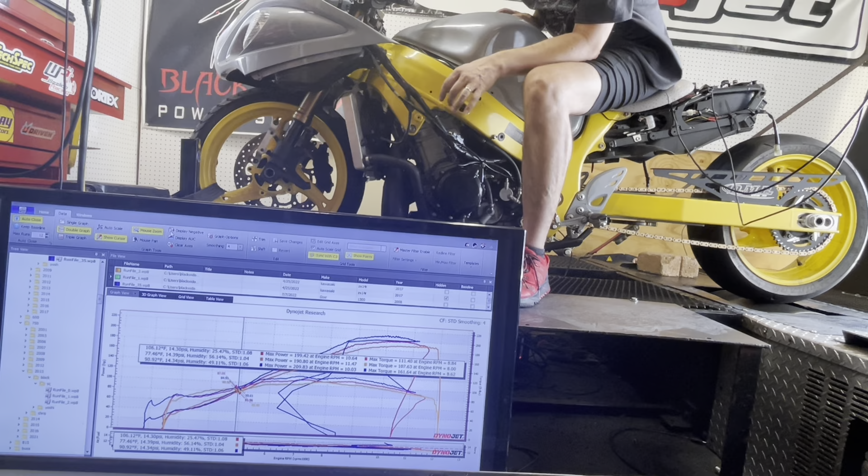It was a little too hot. Here we go again, third time's the charm.

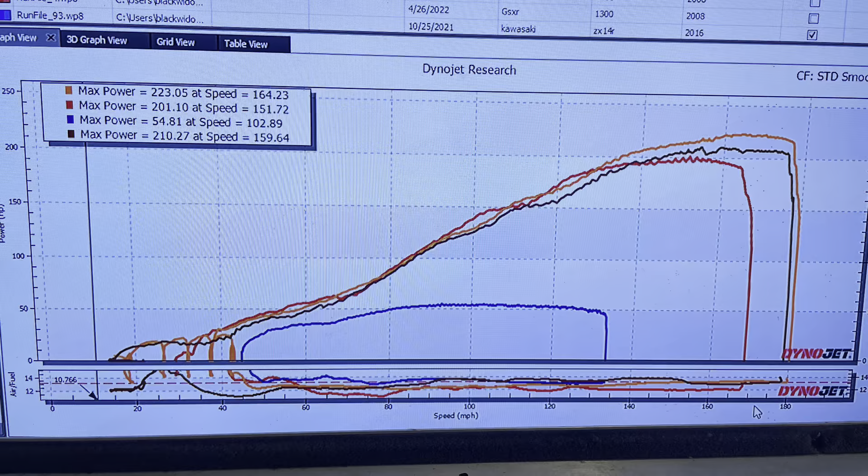So far, we got 200 from before, 210 just now, and 223 with the methanol mix.

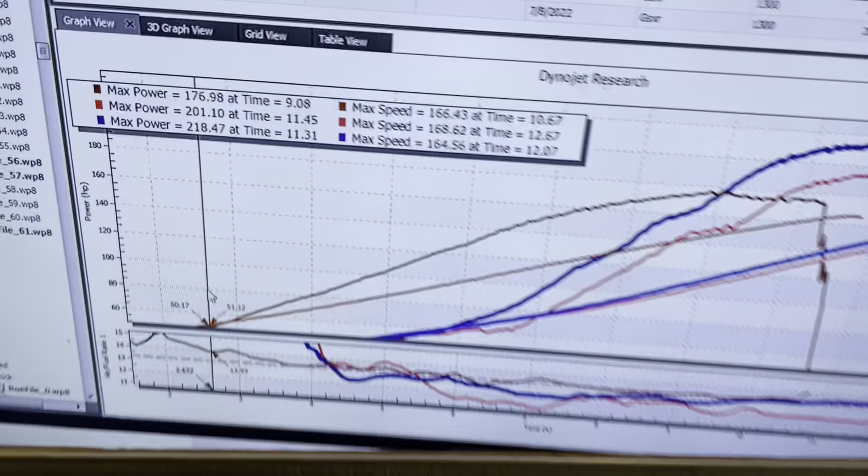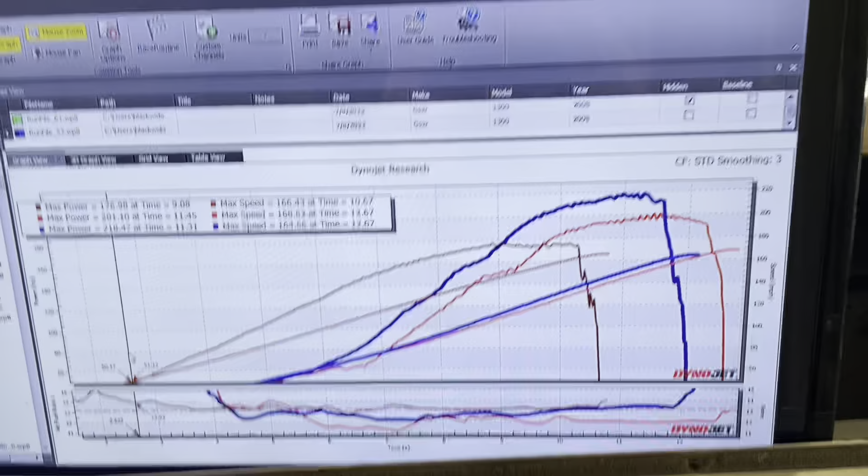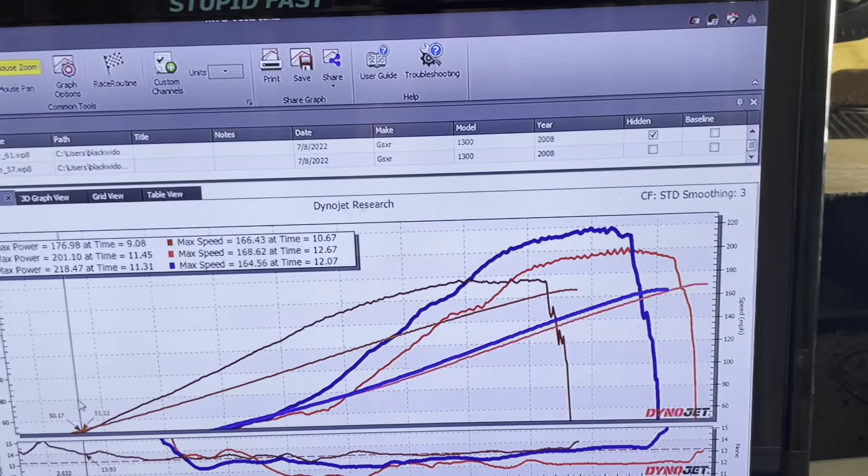All right, we got this on the dyno. It's relatively stock with a Brock exhaust, and we got the time that it started off at. These are the graphs of the yellow Busa, and I'm gonna look at them via time and compare them to a stock motor one, 1441 before we went through and ceramic coated it and timed the cams, and 1441 after.

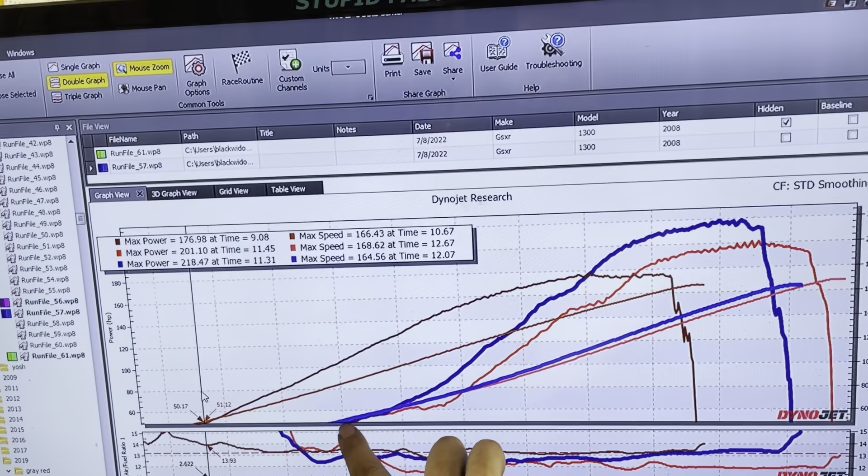This one does not have the same temperature, unfortunately. It had better temperature, so its answers are going to be slightly skewed, but you can already see both the blue and the red are starting at about the same time at 50 mile an hour, and the blue one's definitely finishing way sooner. So let's get those numbers.

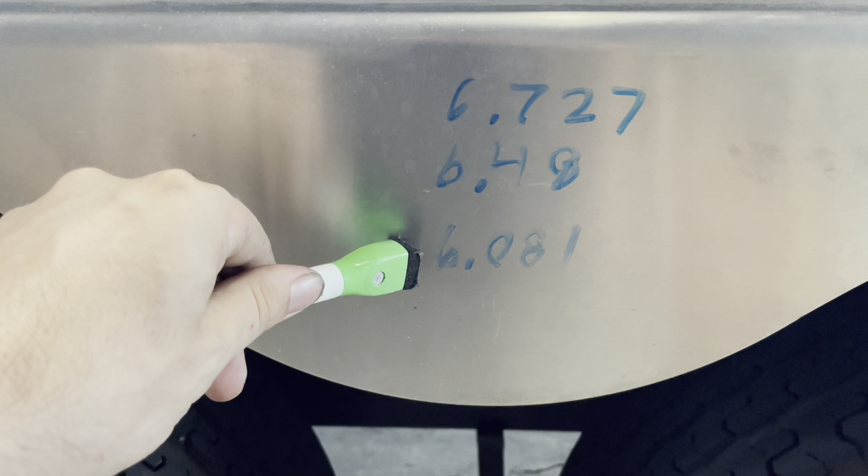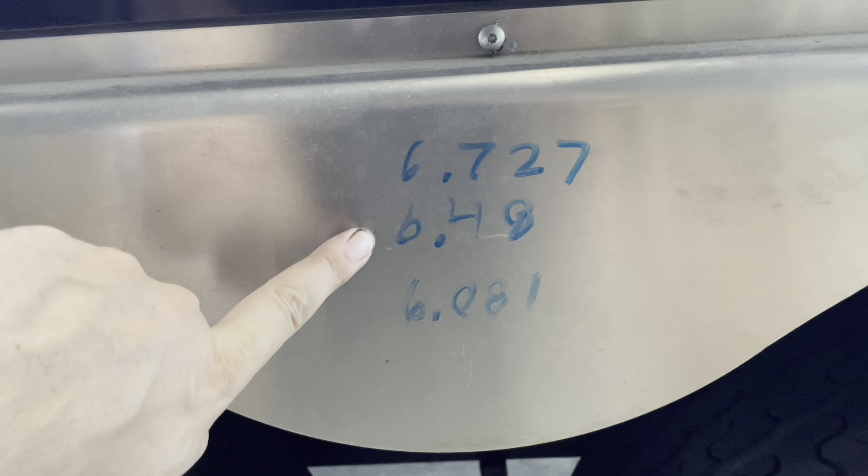6.08. So we got built motor on methanol. We got still a built motor, but not by us, on E85, and we got a stock motor. Keep in mind, this one has got a massive temperature difference. Unfortunately, I couldn't make that equal.

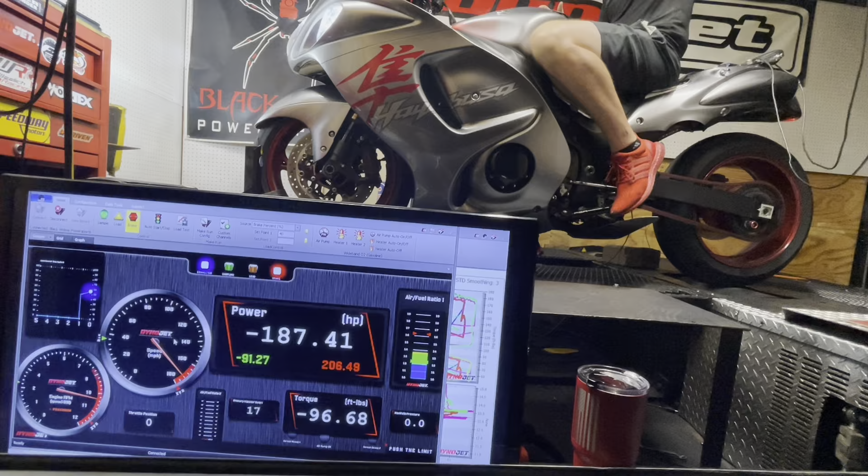Alright, so we got our graphs up on the dyno. You can ignore that 200 on that particular one. The torque is correct, but yeah, we got some spikes in the shifts there. I like showing those runs.

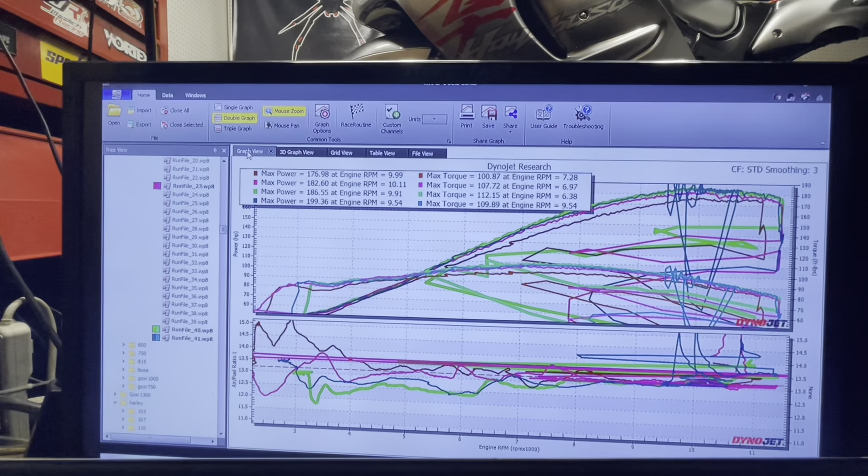But we made 177 on the first run of the day. 100 foot-pounds of torque, 101 foot-pounds of torque, round that up.

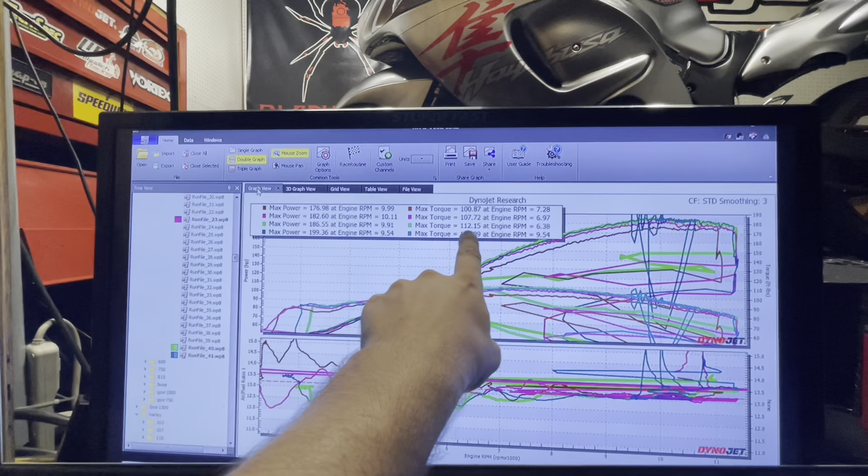Gasoline, we made 182.6 and 107 foot-pounds of torque. And E85, we made 186.5 with 112 foot-pounds of torque. And that was the run that you guys just saw. So I'm pretty stoked about that.

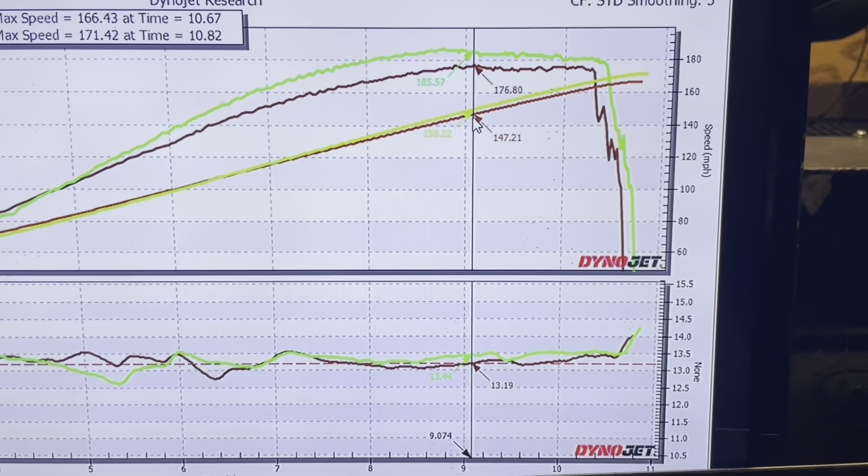See what E85 does with ram air.

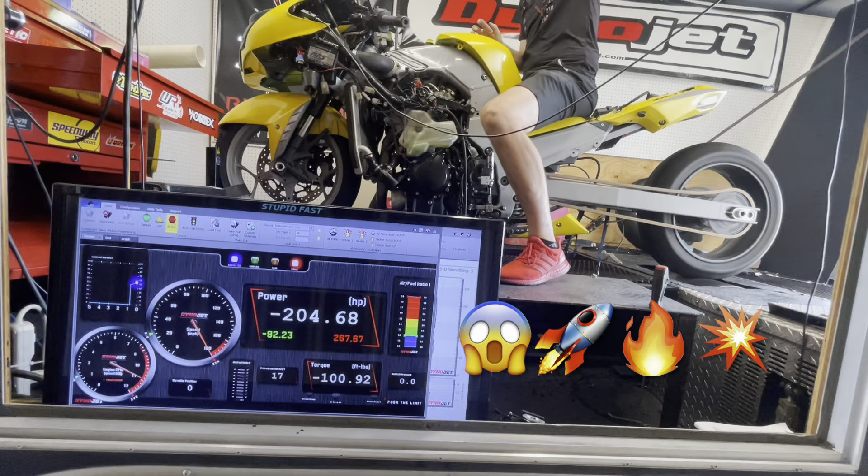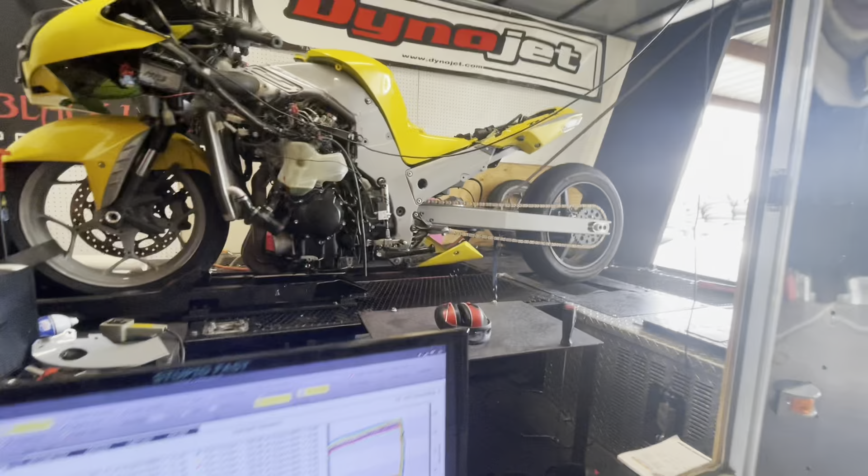We got a different wheel on the back. That's a different tire. No more stupid correction factor stuff. So the torque we made is the torque we made.

So she's actually making 133 foot-pounds of torque, and without ram air, 247, which is a new record for the dyno. On ram air, 257 is peak horsepower.

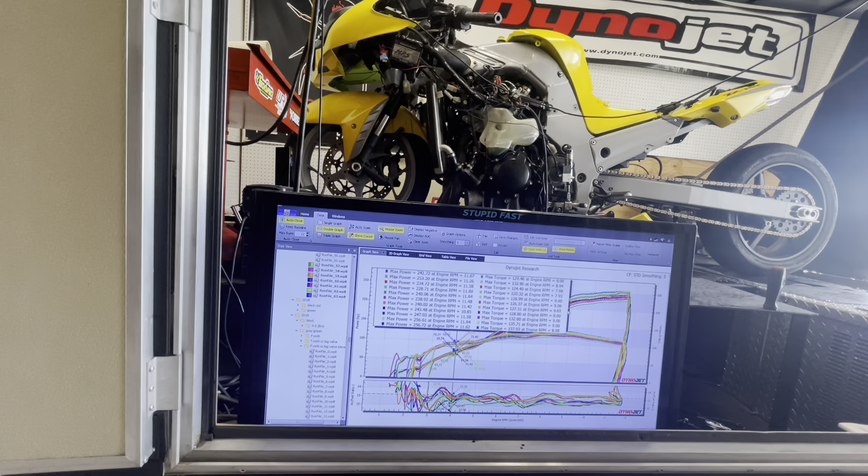She's dripping a lot more. She likes the fuel fatter. Not a new torque record, but definitely a new record.

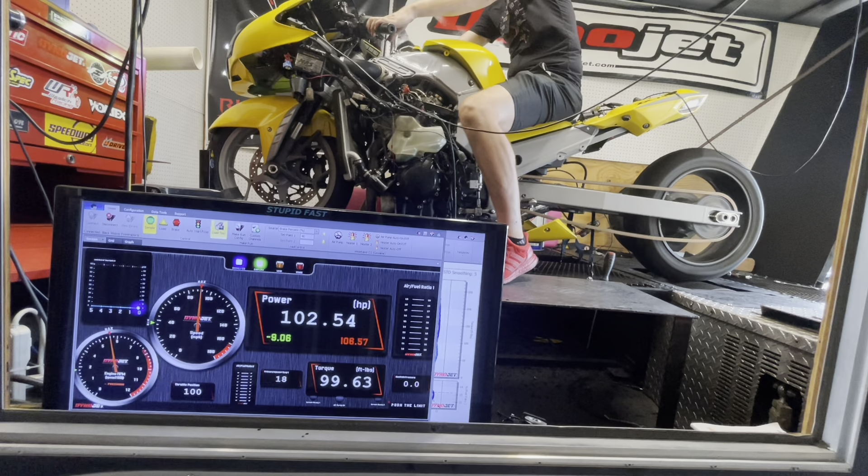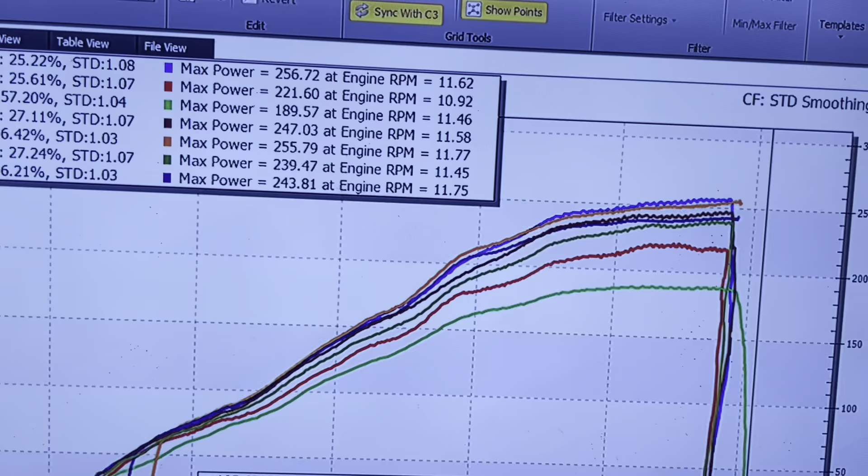I got up on here the yellow one and the black one. So the yellow one's actually the blue run is its best run of the day, and the orange run is the best run of the black one that we built before. It's making some decent amount of power more.

257 versus the 255.8. One peaks out a little bit more and the other one hits a little earlier. But they're both making about the same. Slight differences in fuel between the two. They're running similar mix, but not the same.

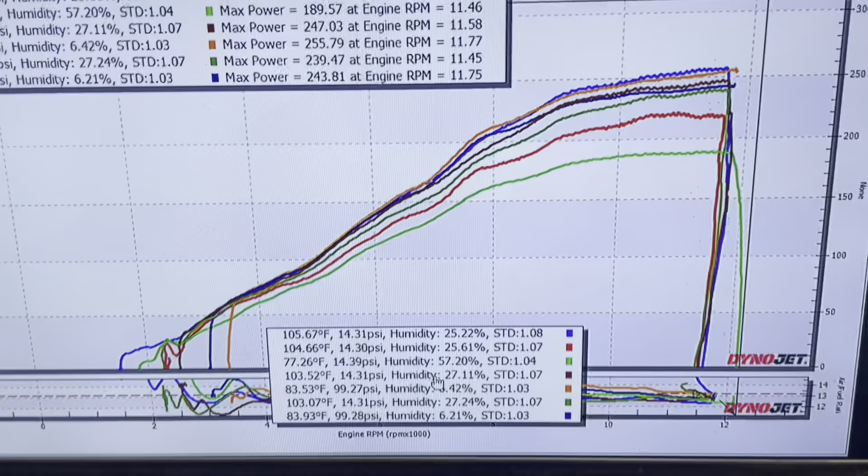And the black one has our velocity stacks. This one does not. But this one also has a high compression piston, and the other one does not. Rest of the modifications are about the same. The exhaust on this is an M4. The other one is a C2.

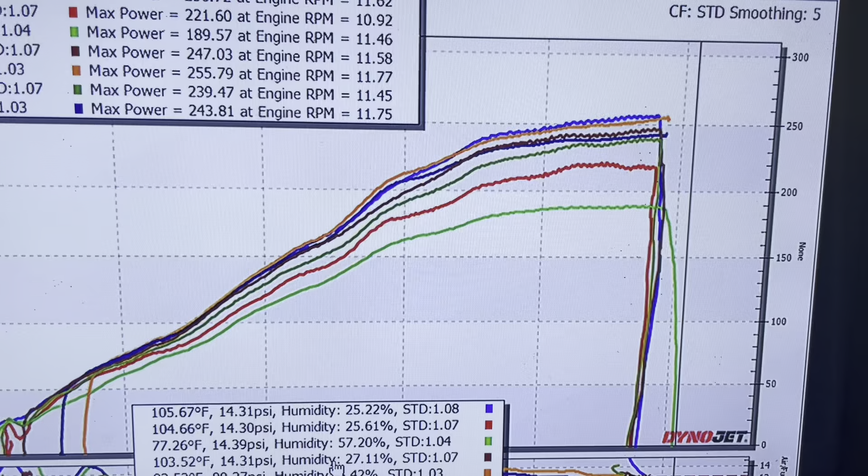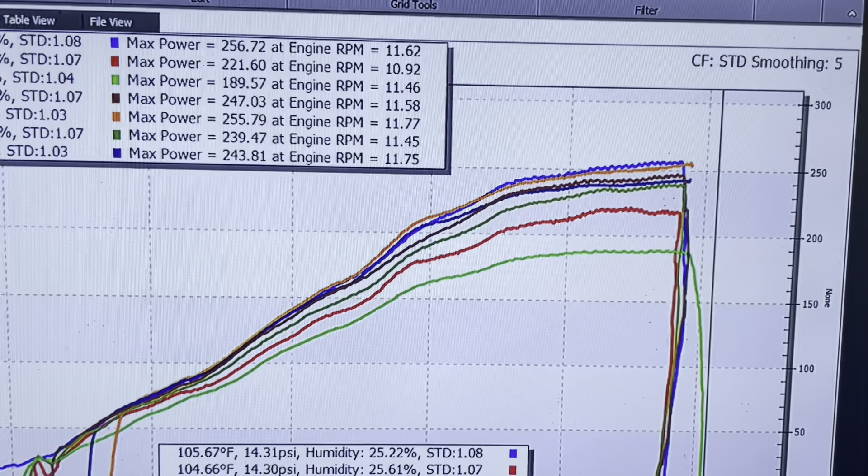That green line is the before. The red line is some gasoline that is some race gas per se. It's not MR12, it's just 100 octane stuff. And then the green line that is in there, that is E85, and then the brown is a different fuel. The dark blue is a different fuel.

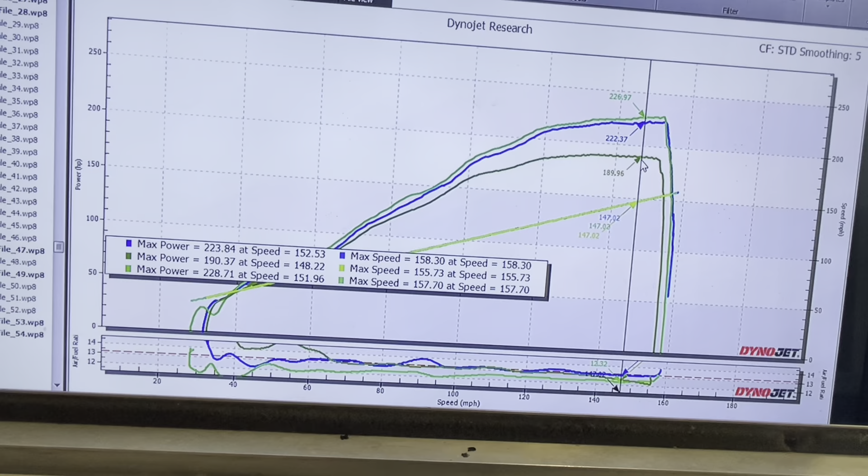Here's what it looks like on the same gearing based on mile an hour. We got a methanol mix, E85 versus the pump gas. That's as close as I could get to the same gearing. This was 4th gear versus 6th gear before. We did a massive gearing change.

There's the two graphs right there, both on the same fuel, same can of fuel. And this one has some weight reduction. We took the balance shafts out of it. It's got our electric water pump set up.

I absolutely recommend that when it comes to running any sort of alcohol-based fuel. That is one thing that the Busa does not have.

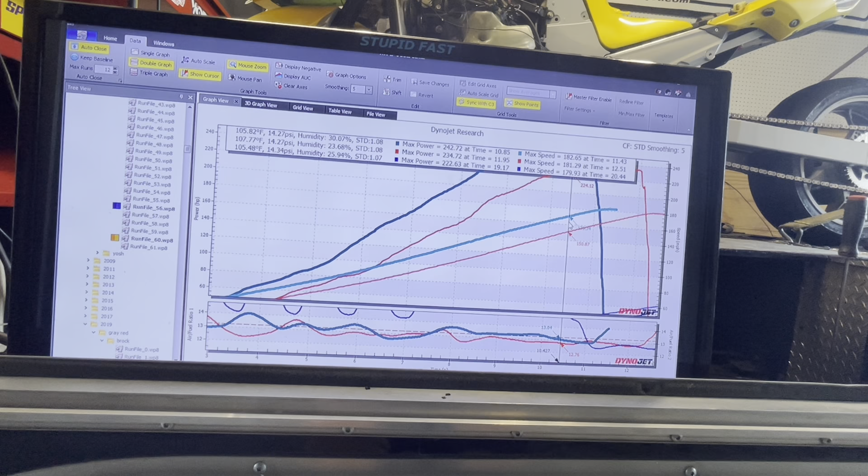I'm extremely stoked with all the things of the day. She's outrunning it a bit, just a bit. So 7 seconds flat.